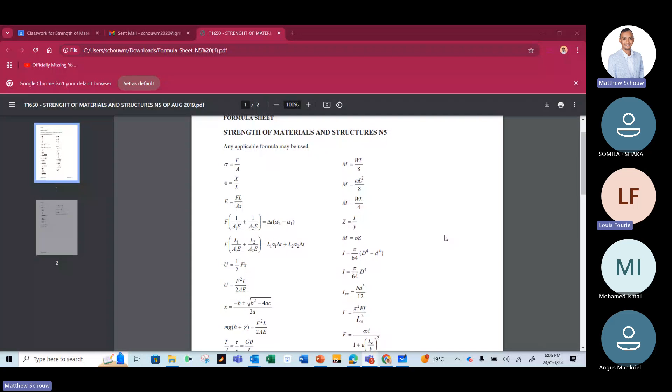Just opening it up, not save it, share, okay here we go. Do you see it? We can see it. So we're talking about those formulas, right? So today's formulas are here, right?

This is today's formulas all over here, this is module 4's formulas, this is module 6's formulas. Here we go, what is this module? That's the buckling stuff, it's module 6.

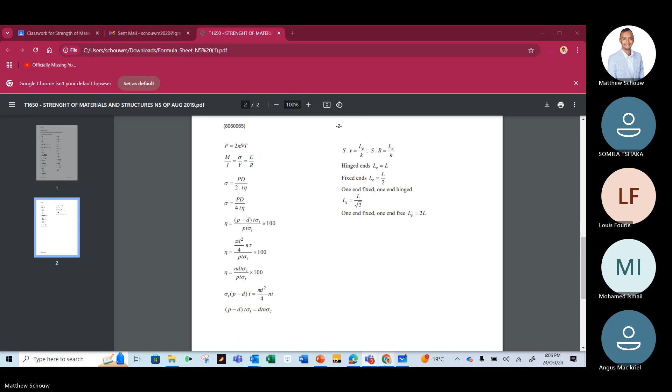I'm not seeing that volumetric formula, eh? That's the one you're talking about, Angus? Correct, sir. Yeah, so what I'm gonna do now, give me a second.

I'm realizing something now, because this I got from a 2019 formula sheet. It is on the latest papers, the volume and the diameter and the length. It's there, right? Yeah, I don't know what paper I got now. It's actually good I'm doing this because I'm realizing now the formula sheet I've been using is old, the formulas are kind of, that's not what I remember them as.

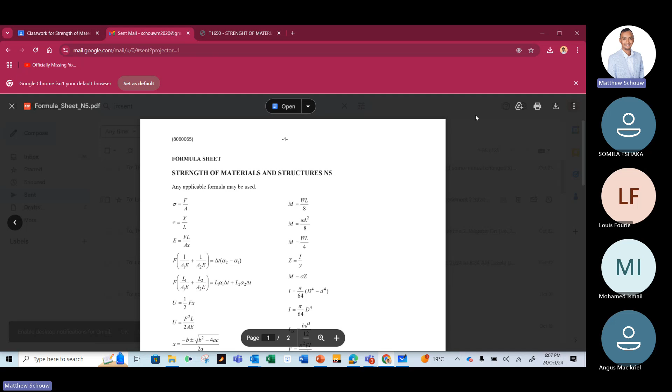My screen is still, you guys can still see my screen, right? Yes sir, yeah. So can you see there, at the bottom left? Angus, can you see it? Yes sir, yeah, there it is.

So it's basically the same, and then they added those pieces here. But you see, it's a 2019 paper, 2023. Yeah, that's what I'm saying, the syllabus changed in 2022. I think that one has a Mohr's circle question in also. Yep, it does.

So yeah, there's your formulas, can you see there? Yeah, so you'll be sorted basically. Yeah, this is Mohr's circle, but look here, it's difficult to teach.

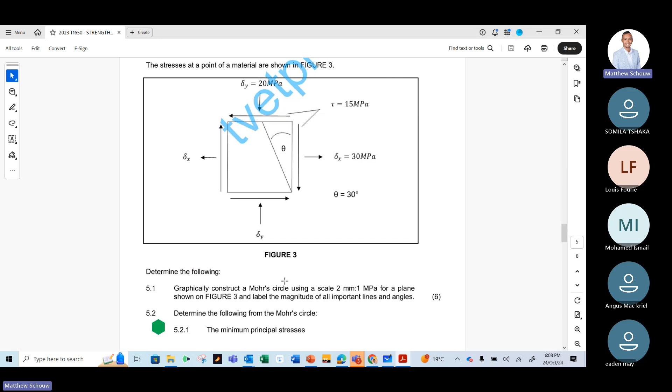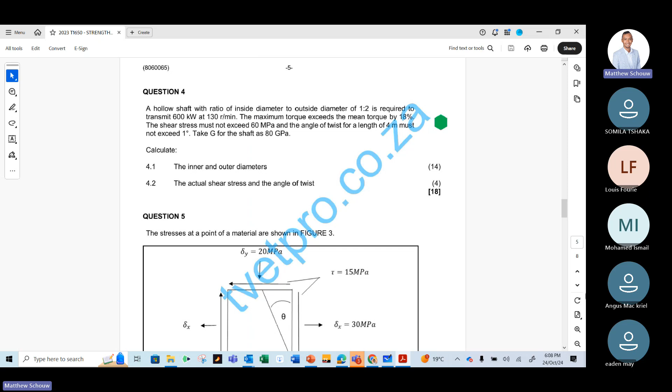Just online, unless I must really go push for the tools, but if you follow the steps it's straightforward. Yeah, this is a good paper to go over, I highly recommend this one, it covers most stuff. I took some questions here from our last test. I mean all my tests come from past papers basically, so if you go over a few tests you should be alright.

All right, I think we're done with that. That was a good point.

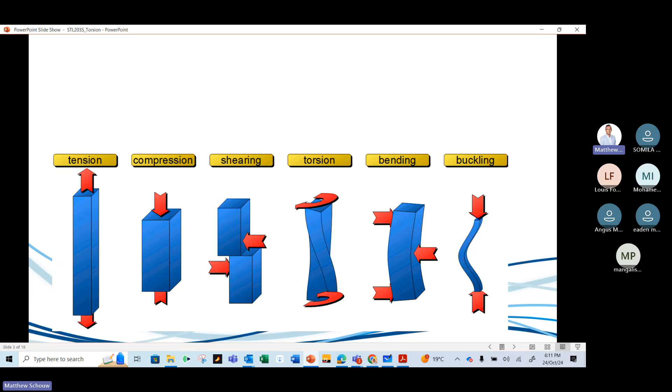Anyway, let's continue with torsion. Again, it's one of the 6 fundamental mechanical loads. So what is torsion? There are some assumptions made in the equations - I'm not going to go into them, but what is important is that they say the shaft is homogeneous, isotropic, and perfectly elastic.

Homogeneous means the material is the same throughout, uniform in terms of chemical structure - the chemical structure affects the microstructure, which affects the mechanical properties. Isotropic means that if you pull it in the X, Y, or Z direction, you'll get exactly the same tensile strength. In reality that's not actually true, but these equations work with these assumptions.

The last main assumption is based on Hooke's law, so we're only working within the limit of proportionality. You may not perhaps know that all the equations we're doing only work within the elastic zone. When you come to the plastic zone, past the yield point, there are more equations. But the ones in elastic work fine. You'll be amazed how much theory there is.

So what is torsion? We have a shaft - we're all familiar with the concept of torque, like a torque wrench maybe - and we're just twisting this thing. So what this here is showing you is a piece or an element in a shaft, and it's basically showing you what's happening to that shaft.

Funny enough, you can actually see a bit more of an element which uses the stress circle, which actually comes up at some point. So they do some formulations - I think your textbook derives the formulas for you. Fortunately for you, you don't have to derive anything, you just have to apply.

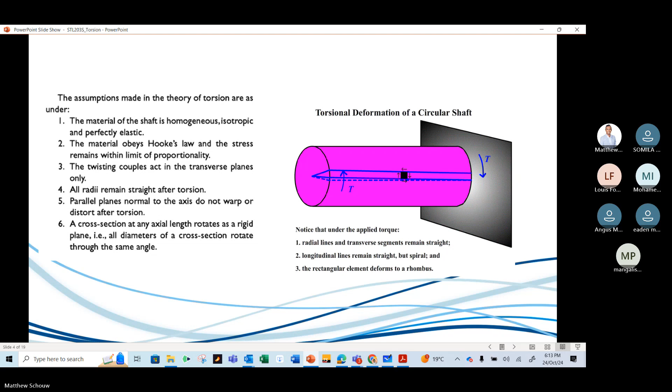I hope you guys can see that. In essence, you induce a shear stress in the shaft, right? So what are all the variables when we're looking at analyzing torsion, which is one of the loads? This guy over here is called the shear stress, right?

That is not the same stress as your tensile stress, etc. It's a different type of stress, a shear stress. We have R, which is the radius - we're all familiar with that. T, which is the torque, that's the loading. Instead of a force, now it's a torque.

We have J, which is a very important property called the polar second moment of area. What that property is: number one, it's a function of the dimension of whatever you're looking at. So whatever shape, whatever geometry you have, the polar second moment would be different. So for shafts, there's one formula: pi d^4/32. Just be aware.

So again, what J actually is for - the bigger the J value, the polar second moment of area, the greater resistance to torque. I'll say that again: the bigger the J value, the greater the resistance to torque. So if you increase your polar second moment of area, your torque will drop basically - your thing will resist the amount of torque. It's in essence making it stronger.

Then that's equal to G, which is your shear modulus, or your modulus of rigidity - it's kind of the same as your elastic modulus, but this is now for torsion, so G. Then you've got your theta, which is your angle of twist. Can we all imagine the angle of twist there? You start over there and you twist it, right? It's like a strain of some sort. I don't know if you're with me.

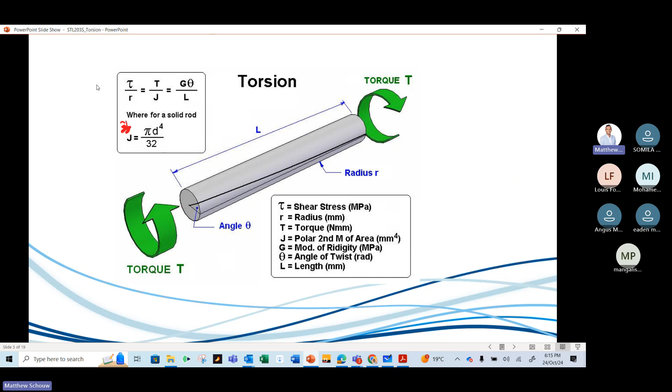And then we divide that by L, which is the length of the shaft. In essence, this is like the strain type formula. But this three-prong formulation is what you do to analyze this whole chapter, so it's very important for you to understand what's going on here. I'll come back to these formulas - it's in your textbook, they actually show how to get it.

So what I wanted to talk about was the polar second moment of area. Once again, as you can see on the screen, in particular in this column over here and that column over here, they all have different polar second moments of area. And what's important, it depends on the shape - if you have a different shape, you have a different formula. Again, the bigger the J, the bigger the resistance to torsion or deformation or deflection, whatever you want to use. Are we all on the same page, students?

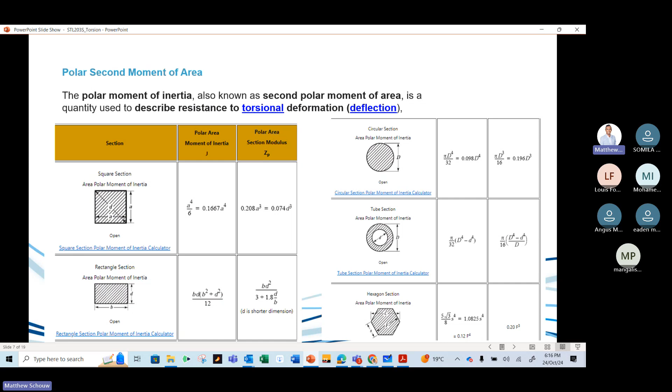Any questions? Okay, so without further ado, let's begin our first question. I'll give you 2 minutes and I'll prep the whiteboard so we can begin. Again, just get the textbook out, ask questions, you know how it goes. Let's have a look.

Let's have a look. Where's this question again?

Tell me, is everyone - did everyone study through Northlink, or is some people new in the game here? I'm just curious. Are you guys all part of Northlink, or is this like one subject you're taking, or what's the situation, Somila, Mangaliso, Mr. May? Angus, sorry? I'm studying through Northlink. Oh, okay.

Okay, are we ready? You can go ahead. Okay, so we're gonna solve, right? Do you guys see my question there? Yes sir, all right, so here we go. Again, it's obviously easier if you go over the stuff, if it's easy for us to solve.

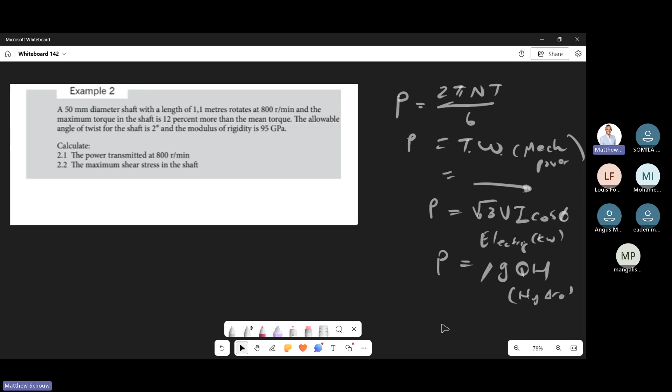Am I showing off here? But yeah, you also get chemical type, which can produce power. If you have a mass flow rate, this is also heat power, due to heat loss or heat gain in kilowatts per hour, change in enthalpy, right?

So in each chapter you can actually compute all the different powers and put them together. But anyway, we're looking at mechanical power. Just showing you the formula you must use there. So let me erase this and begin with today's bread and butter.

Let's read the question. A 50 mil shaft with a length of 1.1 meters takes 800 revs per minute, and the maximum torque in the shaft is 12% more than the mean torque. Very important: the allowable angle of twist for the shaft is 2 degrees, and the modulus of rigidity is 95 gigapascals. They need to find the power transmitted.

So we need to say power is going to be equal to torque times omega. That's the first thing. But we have omega, which is the rotational speed. We need to compute the torque. How do we find the torque, students? Let's quickly see, so you use that formula I showed you.

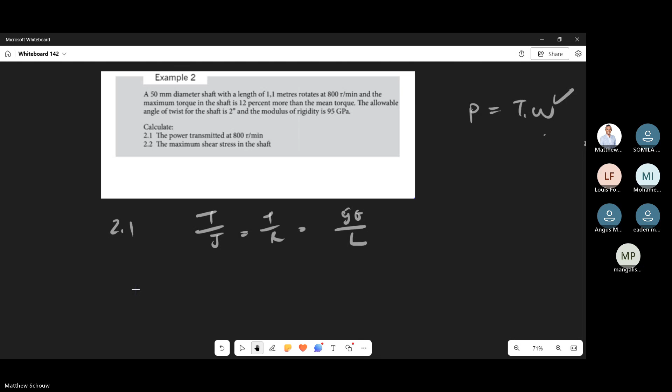The T over J equals tau over r equals G theta over L. Again, it's in your formula sheet. I'm going to paste it for you so you can quickly see this one.

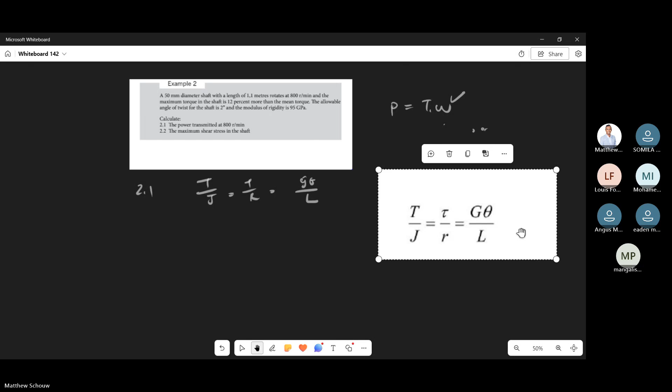Are we all on the same page? Hence, students, can you see that? Today's meat and potatoes, are we happy? I don't know if you're thumbing up, I can't see it. Mangaliso, Somila, can you guys see that? Sure, thank you. Yes sir. Thank you guys, okay let's begin.

So we need to find the torque so we can compute the power. How this typically works is you must look for whatever knowns or data is present in this particular thing. So based on this, I can see a G.

A theta is there, plus we have an L, so obviously this here would be the one. Then we need this side here, because then we can equate this side and this side together. This is how it works. You have to look at what you have and equate whatever you have together, typically. So let's quickly do that.

Here we have T over J, and this is G theta over L. Okay, so these three things are given here. So now we must calculate this J. So J, I'm going to put it here. You know, obviously I'm teaching you and kind of doing a quick tutorial.

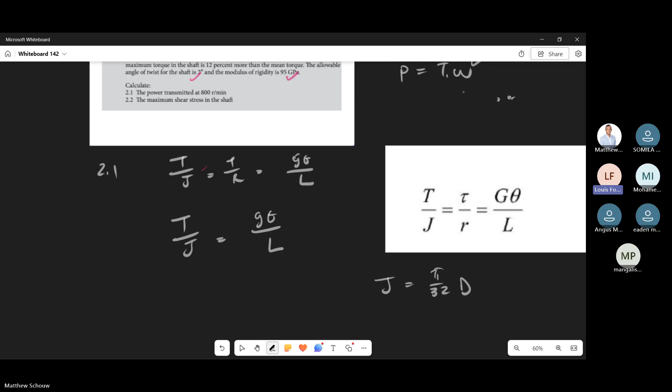I'll show you where the J is, man, in your formula sheet. Well, I don't see the normal J, but anyway it's like this: J equals pi over 32. They only do the one for the hollow on the formula sheet, to the power 4. See, Louis has got it. So if you have a hollow shaft, this is for solid.

For hollow, it's gonna be pi over 32, big D minus small d, to the power 4, like that. So Mr. Lou Furi said they only put up the hollow there, but the solid one you can easily remember just based on that piece over there.

Okay, so we must now compute this J. So J equals pi over 32. Once again, this is the resistance to the torque, and my diameter is 50 mil, 0.05, to the power 4. Okay, so what is my J? Talk to me, guys. I'm hoping we can cover everything today, but yeah, I doubt it.

Okay, so what is my J? 6.137 times 10 to the power -7... just give me a second... right, give it to me again. 6.136 times 10 to the power -7. Yep, and the unit here is going to be meters to the power 4, right?

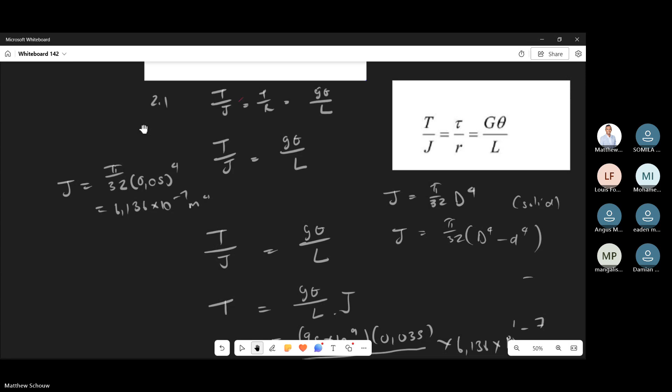You must know it's kilonewton, and we divide this by 60. How much mechanical power do we get? Let's see. We're going to come back to the question because they are talking.

Okay, this I should have done before—let me do this first. So before this, guys, right, I realized the question did ask: the maximum torque in the shaft is 12% more than the mean torque.

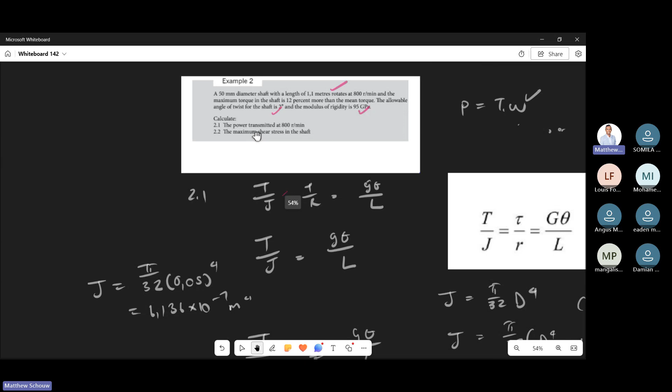So when we calculate this here, this is actually the mean torque, right, the average torque. But we need to now get the maximum torque—that's what we actually need, right? So to get the maximum torque, it's 12% more. It's quite easy.

T max is equal to T mean times 1.12, right? This is the same as saying T mean plus T mean times 0.12—because remember, we're increasing by plus T mean plus T mean times 0.12. You're just taking T mean as a common factor and you end up with this equation.

So we need to compute the maximum torque, right? So if you find the maximum torque, you should get 1652 Newton meter. And that goes in here.

So typically the question wants you always to compute the maximum torque, but it depends on the nature of the question. So again, just be conscious of the mean and the max torque. So yes, go for it, man.

Isn't the torque that you worked out at 1.85, isn't that the max torque already? I'm just asking because the way the textbook breaks it down, that's max already. Yes, I'm looking at it now—this is less, this doesn't make sense.

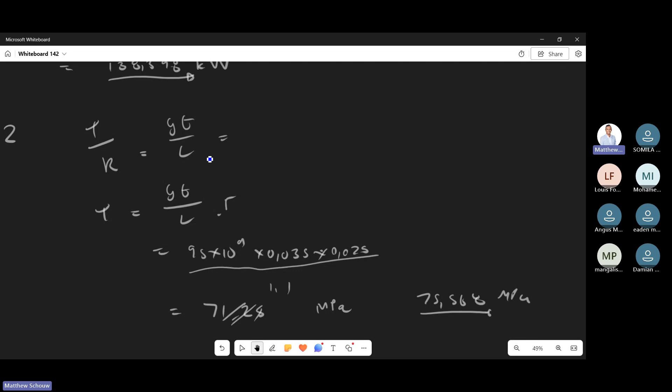Now this is one way of doing it, but if you look at your formula sheet, they give you some nice relationships you can actually use, which I recommend you use. So this one is the torque of a solid shaft. So what this basically is, I want you to do it now.

You see this formula over here, this one? They basically put it in terms of diameter, rearrange it a bit, and you end up with this formula. Sorry, not this formula, they use this one: T over J equals shear over R, and they just manipulate it, and you get this formula. This is what you probably will be using the most. So I want you to use this one to solve for your shear stress now.

Let's see what we get. Answer should be quite close.

Are you with me, colleagues? Do you understand what I mean? Guys are quiet, man. Angus?

Formula? Yes, so again I just use that one. Don't be silent, man, please. Was it driving? Traffic now. Okay, so I'm like basically a radio presenter here.

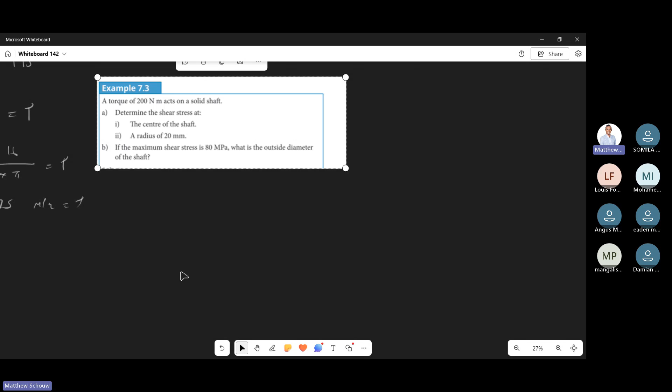Okay, let me give you a small test, man - I'm sure you're able to do this one. Now I'm gonna quickly leave this here, but I'm gonna put up, right? So I want you to use this formula, the one I just mentioned now - this one here, this one. Just want you to solve these problems, but no man, I wanna put up something. Okay, anyway, try it first.

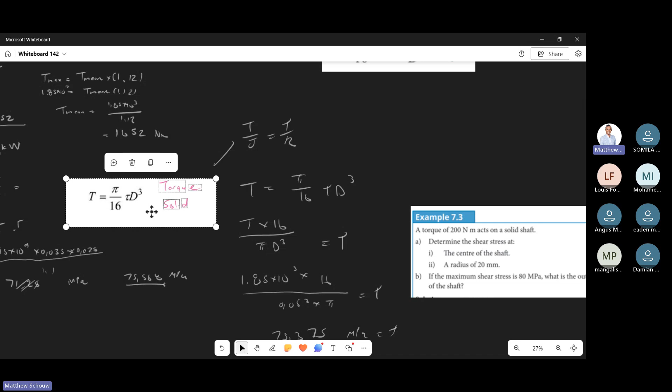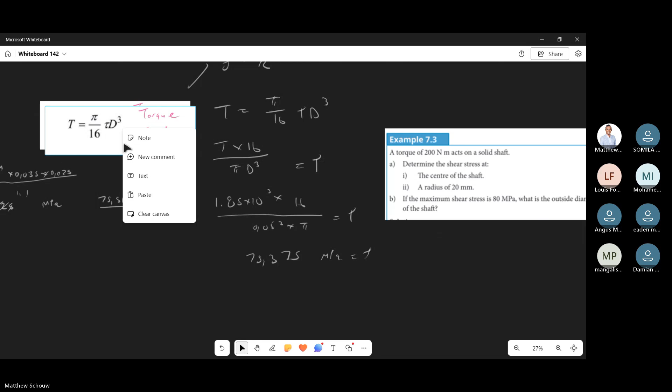Then we can do the next example. Okay, this is not - oh, there we go, sorry. Yeah, use this one. Right, so I want you to just quickly solve this - this should take you less than 5 minutes. Just quickly solve this one.

A, B, yeah. So I want you to use that formula to be comfortable with that one. You're gonna see a nice one - it's basically okay. Another one. Okay, let me know when you're done.

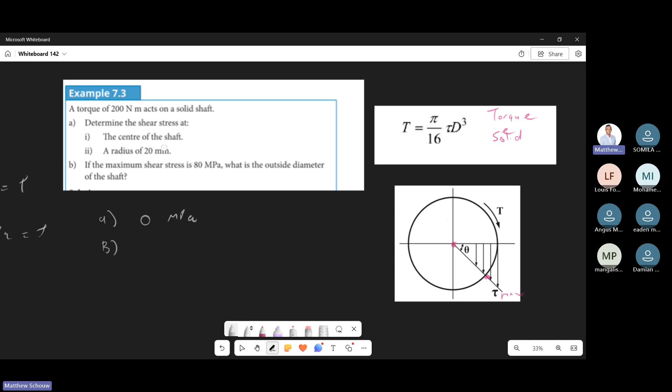Trick question, that is the point. So the higher it goes, the more you get. So in this case, it will be 0 megapascals. And they're asking for a radius of 20 mm. So then you must use this formula over here, you see? You just have to work backwards, basically, because they give you the torque.

Yeah, I'm right, you have to work backwards, so that's going to be easy. 200 equals... are you guys working this out or what's going on? Times, I'm saying 0.04 now because it's the diameter times shear. You compute your shear and you should get around, let me just calculate this. 15.9 megapascals. Okay, 15.9 megapascals, just going to calculate him.

Pi over 16. Is everyone here? Just a yes man, just a warm up, just want to play, and then last one for a solid shaft. 15.9155, another 5. And then for B, sorry, this was, yeah, you know what I mean.

For B, also easy. In this case, they're giving you T max, T, and this is pi over 16 D cubed times shear, right? And now they're giving the shear stress, and now they want to know D, which is a very important thing. So basically what this is, we know we're loading this car of 200 Newton meter. We need this amount of torque, let's say on the engine, or we're transmitting this much.

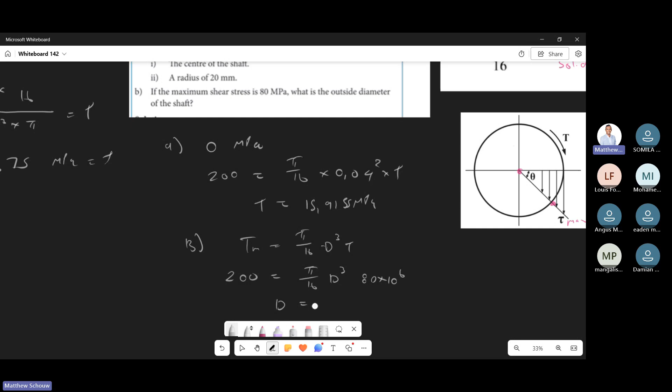Pi over 16, right? Then we have D cubed, and then we have our shear of 80 megapascals. This is a type of calculation where we now have to find some more of a design calculation. So we know how much torque we're giving, we have the material, and now based on this calculation, we are going to determine what size shaft we must purchase or procure and put it in. I don't know if I'm making any sense here.

That's 200 times 16, dividing by the pi and the 80. So this is the shaft we must go and buy, because now we've decided this is our system, and this assumes the shaft won't break. If you choose a different size shaft, it will snap due to torque. You guys with me? Yes sir, yeah, it's just not numbers.

Decisions, right. So what is that D for me? What do you get for the D? I got 23.35 millimeters. Okay, are we all happy with that? That sounds like a shaft. That's definitely not on board a ship. 23 mm shaft, that's quite small, actually. Maybe a toy car, whatever. I don't know, it's only 200 Newton meter of torque.

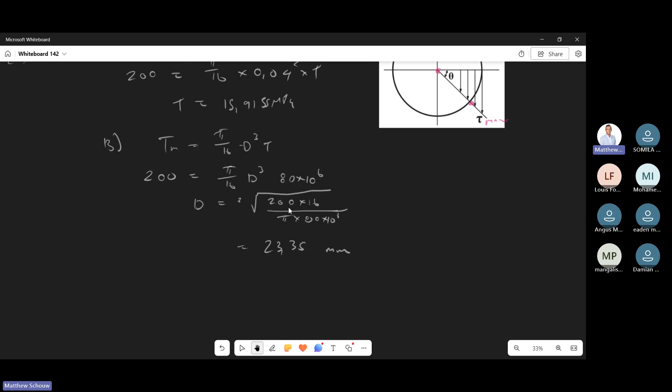So we all get that? Colleagues? Can we move on? Yes sir. Thank you very much. Okay, I'm not sure if you guys are learning anything or I don't know what's going on. Do you guys go over the examples already? I don't know, just hope God can come in here, what he must do.

So example 7.4, this one's a nice one, and I want you to come in here as well. So this is a good one. Now we have to design our hollow shaft. The hollow shaft needs to transmit 3000 kilowatts, that's a lot of power, at 120 revs per minute, to give us the ratios of the diameters, and the shear stress may not be more than 60 megapascals.

So they determine the diameters needed and the twist per unit length. So here they want us to now compute the diameters, right?

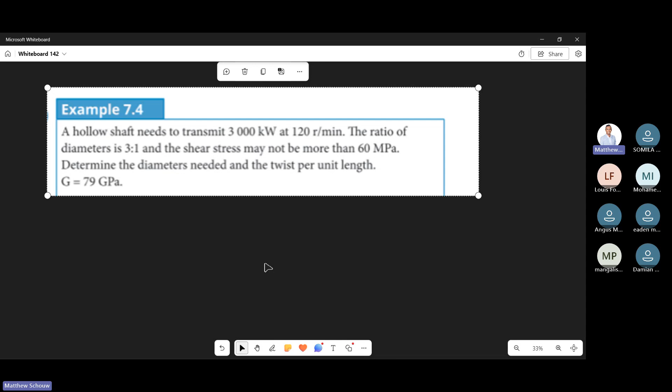The first thing we must do, and I want you to quickly do this, is compute T mean. This is what I'm used to, right? So P equals 2 pi N T mean over 60. I want you to find this for me. Once we find T mean, we must then find T max. But I think in this case, T max is equal to T mean. So just be aware that normally you find T mean and then you find T max and then you design the shaft. Okay, so once you do this, you find T mean.

Now remember what I told you, there's another formula for torque in a hollow shaft, right? So that formula looks like this. I'll paste it here. So I want you to quickly just get me the T mean, if you don't mind.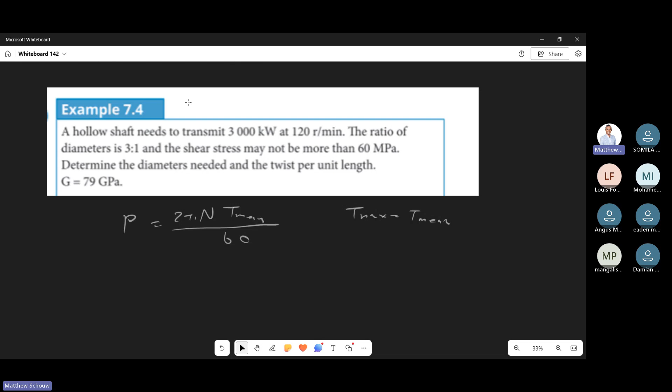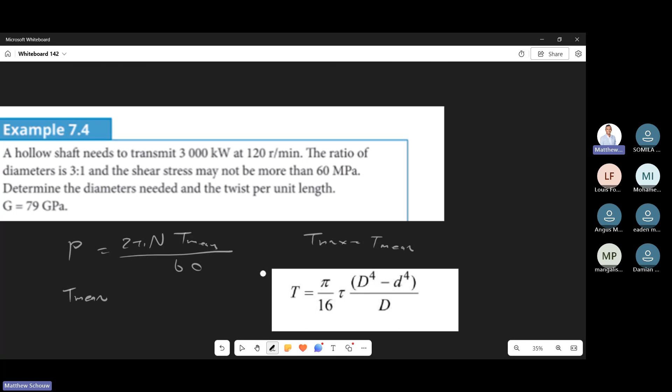I recommend you actually go over this, do it. So you're doing the push-ups now. All right, so you're going to first find T mean here. I'll wait on you guys. Then I can show you how we're going to sort this guy out. Thank you.

Anyone with the T mean? It's 238, yes. 73. Okay, 73. Newton meter? Kilonewton, kilonewton meter, yes, yeah. You can already see here, we require big torque for that amount of power, which makes sense, right?

Yes. So in this case, we have T mean, right? Normally you have to find T max now. So I'm just giving you the standard story. In this case, it doesn't happen. So we are assuming our T mean is T max. Once you have this, we must come to this formula.

What I'm doing here is very important, right? This is a standard thing in your exams, even your tests coming up. So with this, we now have to equate this, but now we're looking for diameters. But they say there the ratio of diameters is 3 to 1, right?

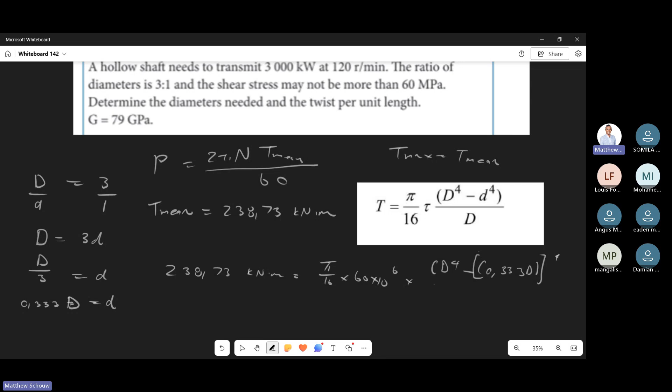So big D, we're already looking for. Small d is, remember, 0.333 big D, but this whole guy is to the power 4, and we divide this guy by D. Okay, so then let's quickly solve this. So what we do now is 238.73 times that, and we're dividing this out by this. So it's pi over 16 times 60 times 10 to the power 6, and then we're left with big D to the power 4. I need to find that for me.

And then minus, it's going to be 0.333 to the power 4, and then we're going to have another D to the power 4. See there? Maybe you guys can see that there. And then we're just going to divide that by D. Okay, let's see what we get.

What is that thing equal to there on the left-hand side of the equation?

So let's quickly find that left-hand side. Damian, you quiet? Eaden, you quiet? Mohammed, you quiet? What's going on? That was saying.

Actually, I'm just listening. I came a bit late, so I'll just go through it again. So I'm just okay now. Right though. Somila, you got it. What is that? What is that side there?

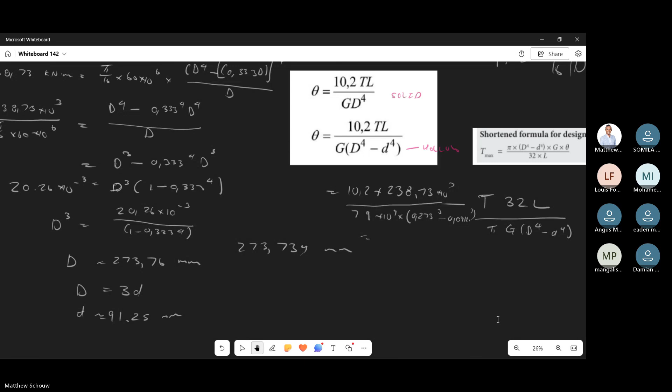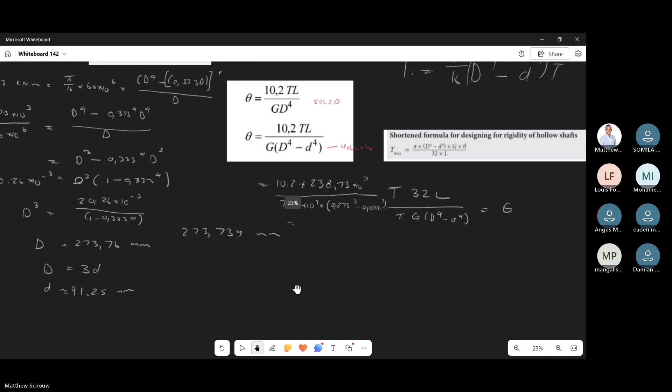Guys, can you guys hear me? Yes, sir, yes, yes, can we move on? I don't know, I think my mic was muted the whole time. You guys are not saying anything, but do you guys manage to get the theta?

I got 5.55, not sure if it's right. Yeah, it's correct, so it's 5 times 10 to the power minus 3, yes it's 5.55 times 10 to the power -3 rads, rads per meter. And obviously, if you want to convert this in degrees per meter, you're just going to times this by 180 over pi.

So I'm just mentioning that this and this thing is the same thing, that's what I was talking about. I thought my mic was on the whole time. Is there any questions? Gents, say something. No questions from my side.